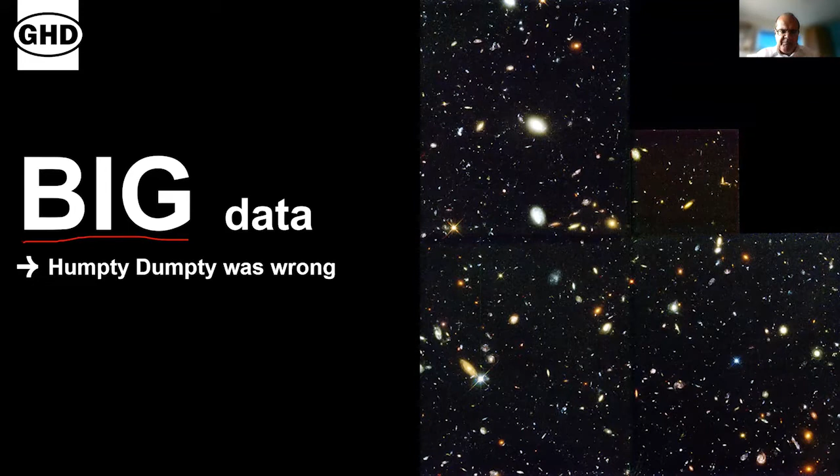So I thought we should at least try and understand up front what we mean by big data, and you'll see that I'm then going to put that into a land contamination context. That's the abstract that accompanies the program.

So I'm going to talk to you a little bit about what tiny data is, and to remind you that what we're after is getting meaningful information to help us understand our sites better, to make sure that those conceptual site models are as good as we need them to be. And the way that we do that is by understanding the uncertainty in those conceptual site models, of which there are two types.

There is epistemic uncertainty, stuff that we don't know well enough, but we could learn better if we went and took more samples, did more investigation. And then aleatory uncertainty, which is a function of the natural noisiness or variability of the thing we are studying, the arsenic, the methane concentration.

And what we are doing in using data to populate our conceptual site models, and you'll see that really well illustrated later on, is bringing together tiny and big data. And that's not a trivial action.

So the extraction of that data depends on really understanding your data, the kind of numbers, the resolution, the precision, what the columns are called, how they were collected.

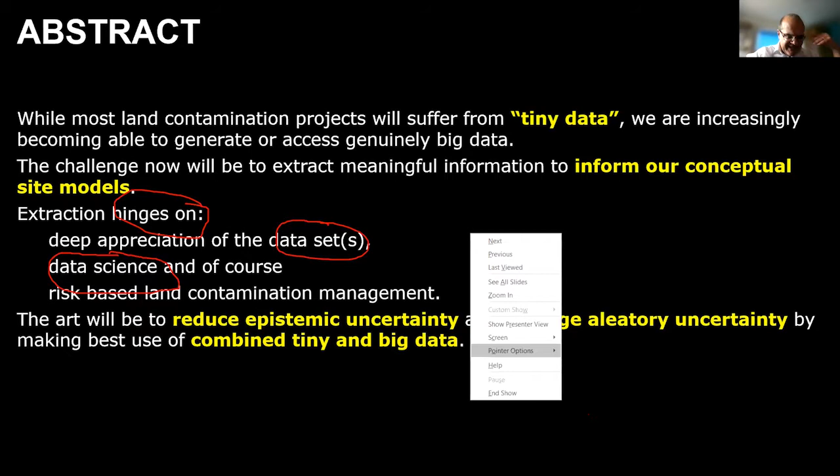So the third dimension of understanding your data and coming up with something meaningful, trying to listen into the part of the conversation in the hubbub of a party, is understanding the context in which it's being used.

And in our case, it's about risk-based land contamination management. So you need to understand your data, you need to understand the maths behind data, and you need to understand the problem space that we're working in.

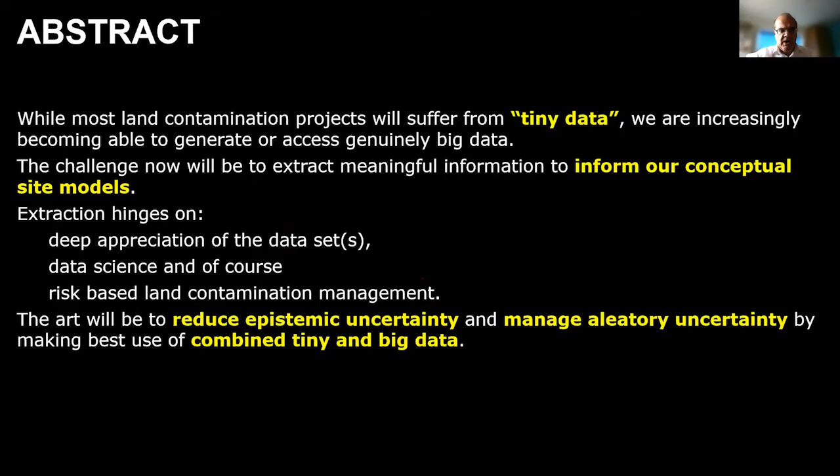So land contamination risk management, the guidance published by the Environment Agency last year, updated earlier on this year, adopts a staged approach, beginning with a preliminary risk assessment and then going quantitative with either the use of generic assessment criteria or site-specific assessment criteria, at the end of which you decide whether or not you need to remediate.

If you are, you then need to decide how you're going to do your remediation. Then you invoke your Nike moment and you do it. And at the same time, you're collecting the evidence to prove that the remediation was a success.

So that's land contamination risk management. That's the problem space we're in.

Tiny data. So I've got tiny data at one end and I've got big data at the other end. Tiny data is where you've got such a small number of sample locations, analyses, that each item is precious. So you don't summarize it, you don't produce an average, you deal with your entire data set.

And I've taken from the front of the statistics guidance that CL:AIRE published last year, a checklist of 7 things you need to think about before you open page 1 of that guidance. So before you embark on a statistical analysis, you're supposed to check the 7 things in front of you.

I'm not going to go through them, but I am going to go to the last one. And that is that before you embark on any clever statistics, you need to be satisfied that the number of samples is enough for a statistical analysis.

And if it isn't, well, anything you do after that is invalid and likely to get you or your client into trouble. So tiny data, we don't have enough to do averages and standard deviations and that kind of stuff. Big data we'll look at next.

So the traditional way of looking at big data is through a series of V's. And originally there were 3: volume, velocity, and variety. More recently,

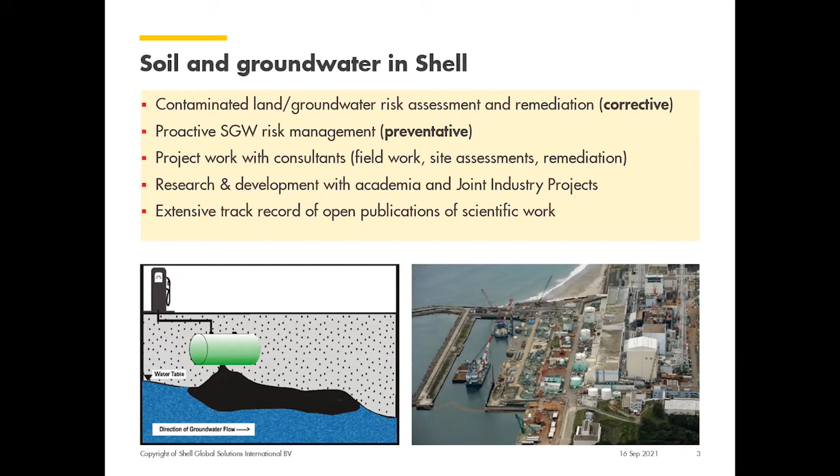Also in R&D, GWSDAT has come about from a joint project with the University of Glasgow, and that's been going on now for almost 10 years effectively. We like to work in an open and transparent manner as well.

So GWSDAT, what is it? It's a user-friendly open source decision support tool for analysis and reporting of groundwater data. It's designed to be easy to install, quite intuitive to use, and it only requires a standard monitoring data input.

A little bit about the history: it was principally designed for the retail networks, right? So this is the smaller sites where it perhaps wasn't worth the effort in moving that into a full ArcGIS system, that's where it actually came about. It's grown in scope since then, and it works equally well for the larger sites as it does for the smaller sites as well.

There's a variety of different ways you can input the data now, and we'll show some of that in the interactive demonstration. The holy grail that's not there at the moment, which can be done but we're still waiting for it, is directly into database. I think that's the next big thing in GWSDAT in terms of data anyway.

It's been used now for over 10 years in Shell, typically in its combination of refineries and terminals and all the rest of it. And we did a survey, and there were 4 common themes where the benefits came out of it.

Supporting design optimization and monitoring remediation programs, so we avoid collection of redundant data, and we want to know where the weaknesses in your monitoring program are. You can spot early identifications of new leaks quite quickly.

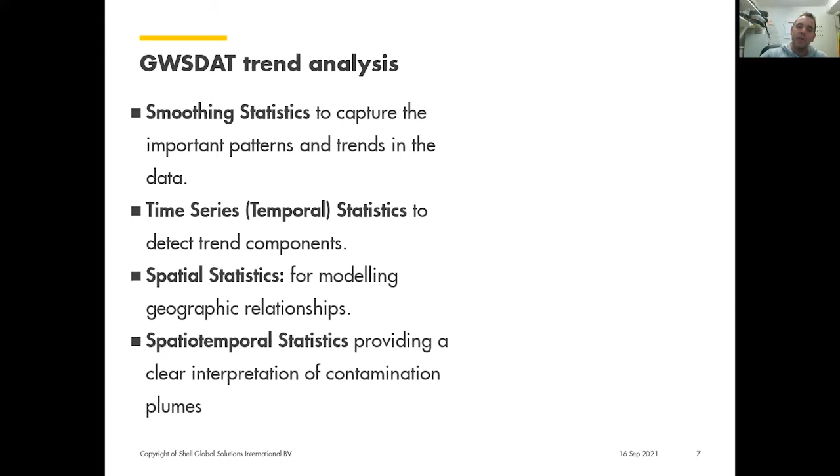But what we do for the groundwater concentrations is very unique. The unique aspect of GWSDAT is that we do spatiotemporal statistics. The way the industry typically works is we do a sampling round, sample concentrations across the site, and do a kriging to fit a spatial surface to it. Then we'll repeat that exercise independently for the next sample round, and again. GWSDAT does it differently.

Instead of doing three independent models in this use case, it does it in one spatiotemporal framework. And there are benefits in doing that. Most notably, it's about the amount of information you gain from that complete data set. You get more information out from fitting one spatiotemporal model than three independent ones, basically.

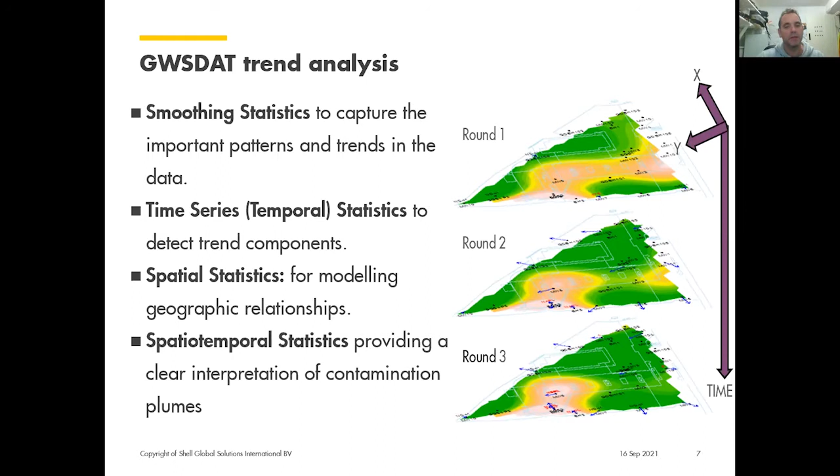GWSDAT has got some plume diagnostic tools in it. What this means is it has the ability to automatically track the plume mass, plume area, and average plume concentration. And you need to do very little, basically.

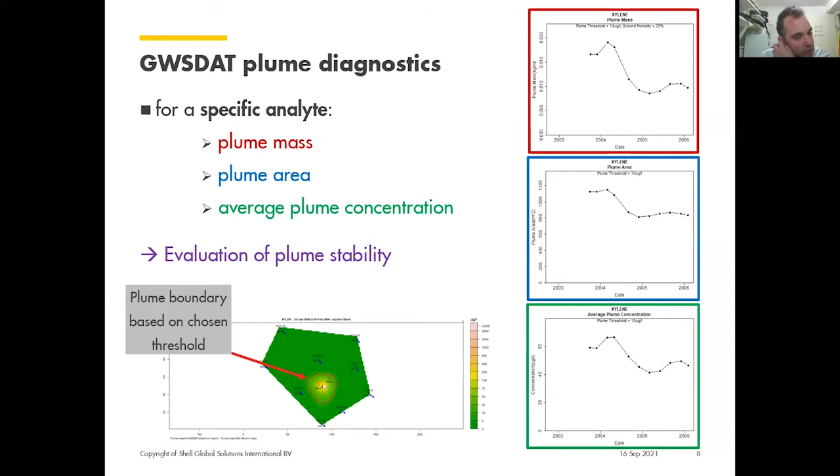So what it does is take this surface and basically just numerically integrates under that curve, effectively. You'll also notice there's a cross right at the bottom there—that's pointing to the center of mass for that plume as well.

In terms of going forward, the major future direction of GWSDAT is going to be network optimization. We'll reference this paper here, and what we do is quite a technical study—comparing simulations of groundwater plumes and real data sets, looking at the difference between doing independent spatial models versus one spatiotemporal model.

You can see that basically you get more information using fewer observations with a spatiotemporal model. And of course, the people already using GWSDAT get this benefit, because it's adopting that spatiotemporal framework. This is what my kind of mission is—trying to push the benefits of spatiotemporal analysis in this domain effectively.

We've got a new PhD student, Peter. He started back last year, actually, working on implementing cost-effective spatiotemporal approaches to optimize groundwater monitoring network design analysis. So basically he's going to be looking at bringing more tools into GWSDAT, like well redundancy, or more sophisticated well redundancy, well sufficiency.

In other words, if you had to build a well, where would you construct it? Sampling regimes which take advantage of the kind of spatiotemporal network, etc. So there's a lot of work that Peter's got on his plate there.

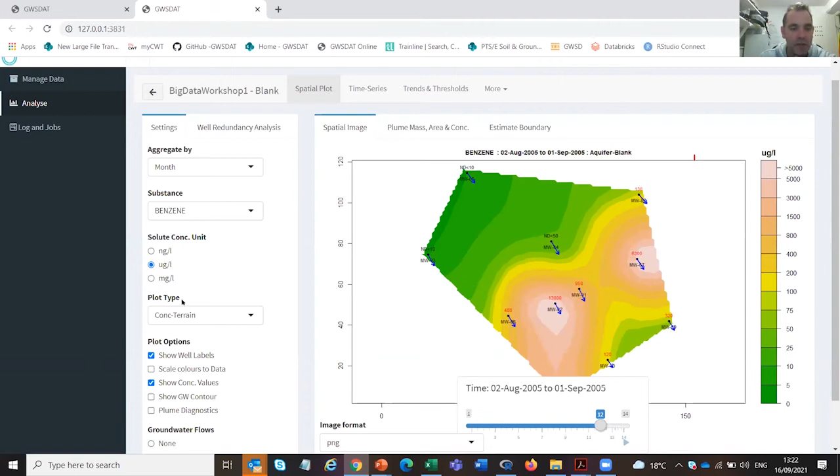There are also kind of bubble plots. If you don't trust the spatiotemporal model for any reason, you can always fall back on just a graphical depiction of the observed data set.

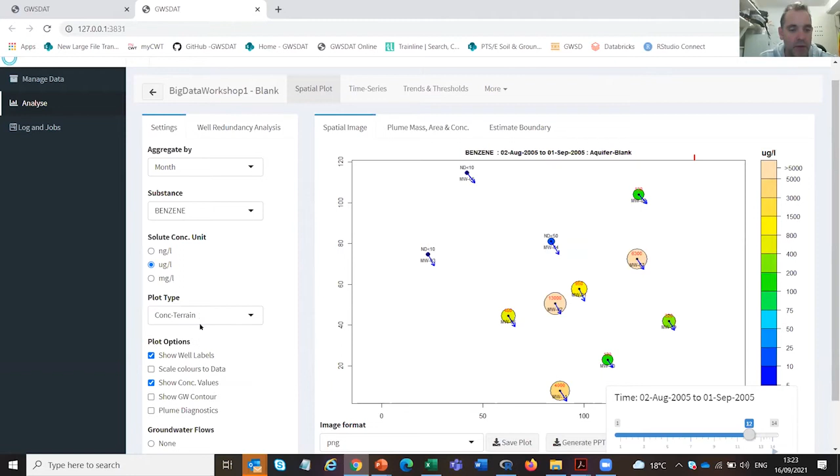There's even a black and white color scale as well, which is useful when printing out these types of graphics on black and white printers. What we found is, if you print this in black and white, it doesn't naturally translate very well, so it's a useful addition.

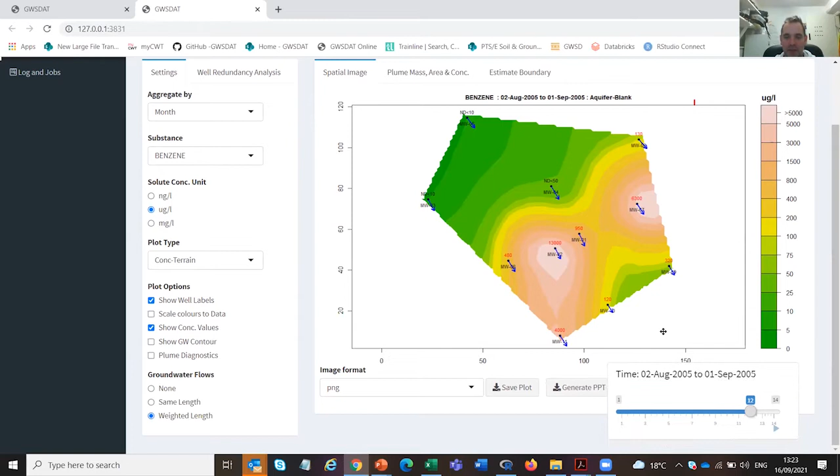And you can also turn off the groundwater arrows as well. So on this tab here, what we have is the plume mass and area concentration.

I'm going to choose xylene here, and it's going to answer one of the tutorial questions effectively. You can see just by selecting this tab and clicking plume diagnostics, it basically delineates the plume using a concentration value of 10 micrograms per litre.

You can change that as well to what you see fit. And you can see, because it's managed to delineate that plume without going outside the site boundary, it's produced some plume metrics, namely plume mass, plume area, and you can see the centre of mass there.

By clicking this tab, what this does is it effectively does that going through time. What we found is that's more useful than just looking at the evolution of the individual spatial images. So that's question number two from the tutorials answered effectively.

How do we get a time series? Well, it's easy peasy. You just click this tab here and it'll do it for you effectively. Yeah, and you can see.

There's one question. Someone's saying in the chat box that they get an error, non-numeric argument. I'm not sure if that's something you could address. I get an error non-numeric.

Oh, I've not seen that one. Is this on the online version? Maybe on no local. Oh wow. Okay, well, maybe we can take this up. Or do you want to share your screen, or how do you want to do this? Can you provide a bit more details?

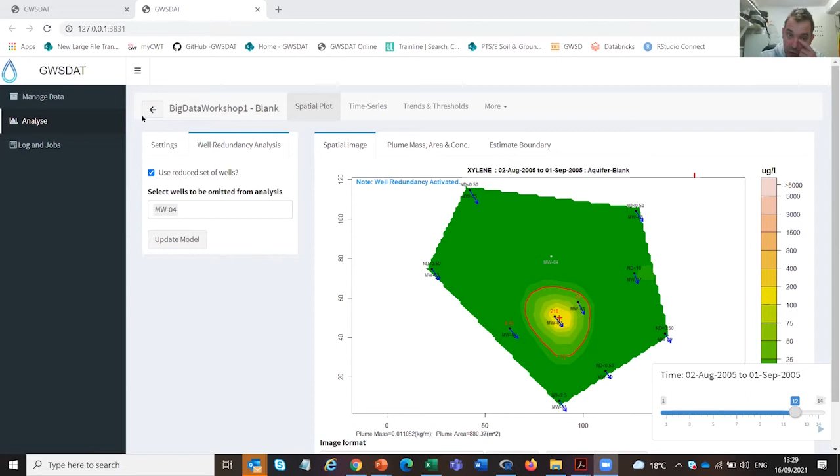If you choose xylene, that's the key here, okay? You need to choose xylene, because with xylene you can get this delineated plume that doesn't go outside the site boundary.

If I choose, for example, benzene, you can see the plume isn't fully delineated within the site boundary. So when I do that, you get 'unable to calculate' - it needs to be completely within the site boundary. I think that answers that question.

All right. Cool. Okay. All good? Yeah, that's good. Cool, right, okay, I'll carry on - good questions, good questions.

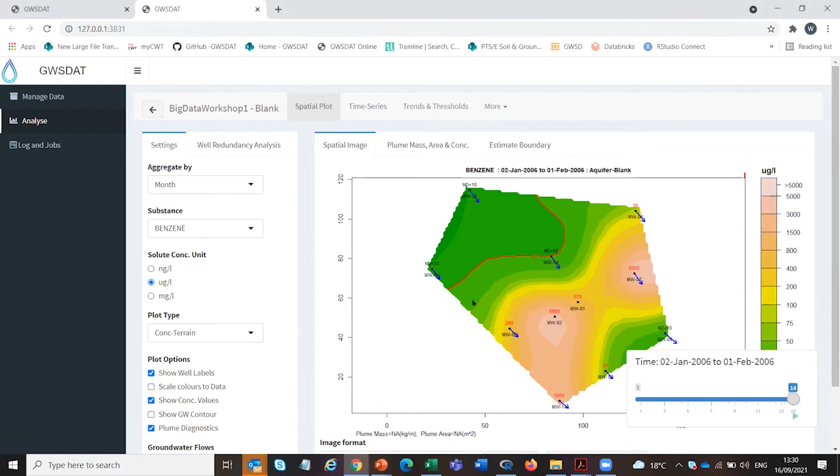So that's mostly it about the spatial plot. Let's go to the time series. This is what I spoke about earlier, where you can basically choose different wells and substance combinations and drill down into individual wells.

You can see the data here for that well in black. Non-detect data gets plotted in orange, and we've overlaid the predictions of a one-dimensional smoother. This is key to the difference between fitting a smoother function as opposed to a linear regression - the linear regression interpretation is just flat and straight throughout the history of the well. But in reality, I'm more inclined to believe this, which says it increased rapidly and is gradually going down in time.

There are various different options, like showing a legend. You can also overlay the groundwater elevation on the right-hand scale there, and that's useful for picking up correlations between groundwater elevation and concentrations.

There's also another functionality here which does more combined analysis. It's called the well report, and this menu here. Basically, you can choose to overlay multiple substances or solutes in a grid-like structure, so you can drop any combination of wells, update the plot, and choose different solutes.

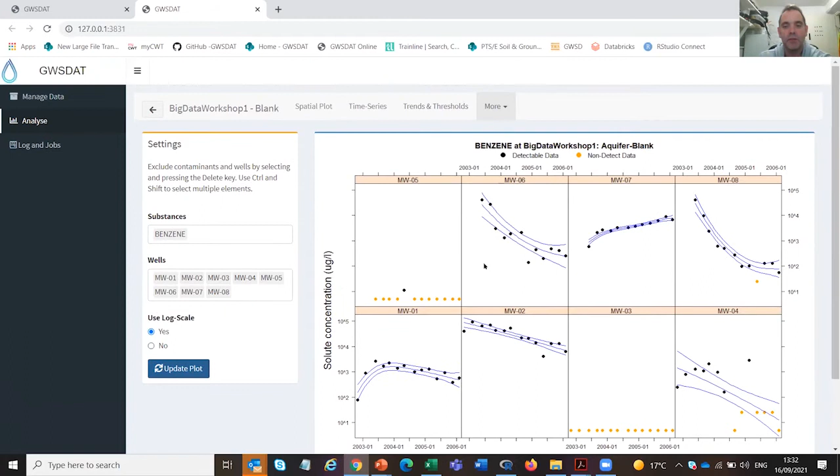If you just choose one substance, it does something slightly different, giving you this smoother result, which you can turn off at any time. It's one of my favorite plots because it plots everything in a single plot. It's very concise - the kind of thing that used to take ages to do in Excel. Even on that basis alone, in terms of producing graphics and display plots, it's very good for saving time.

The other tab here is a trend and threshold indicator matrix, and this is going to answer question 2 or 3. What we have here is a matrix plot - the columns correspond to the different solutes and the rows correspond to the different wells. What this is doing is looking at each one of these individual plots and calculating the gradient at your selected time point, which is at the end, after the most recent sampling. It's looking at the gradient at this point and reporting it back using this color code.

Strong green or dark green means it's coming down quickly. Strong red means it's going up quickly, and white is approximately flat. It's gray if there's no data to calculate it, and it's blue if it's non-detect. I think it's safer to just report it's non-detect rather than start interpreting trend from substituted data.

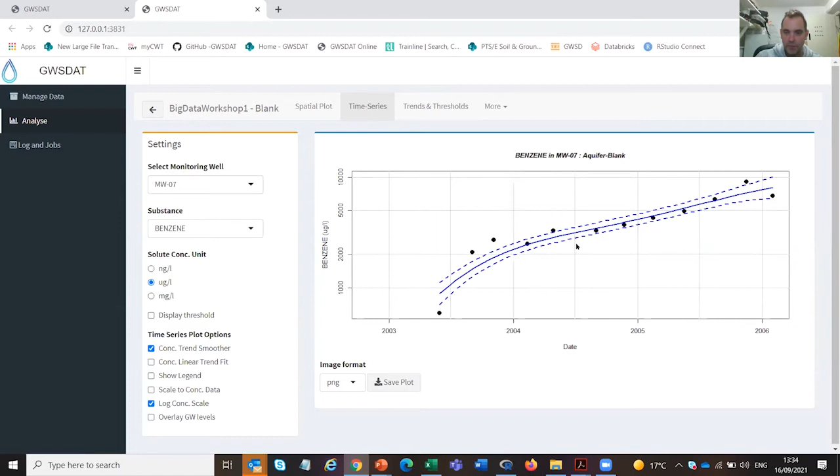You can see here in this example we've got 2 reds, and that's benzene, monitoring well 7 and 11. So if we drill down back on them, look at number 7 - there you go, lo and behold, you can see that in this well it is going up very quickly. Monitoring well 11 is still going up very quickly as well. So this is a high level, high throughput check on all the different combinations of wells and contaminants, where you can identify the problem wells.

There are a variety, so that answers question number 3. The answer to that question is benzene and monitoring well 7 and monitoring well 11. Let's go back before I do some more.

Let's familiarize ourselves with the next questions. Using the online version, loading the previously saved GWSDAT session, basic example - how do you save a GWSDAT session in RDS format? Well, with the online version, let's do the comprehensive example. Can you plot NAPL thickness and repeat using the Excel-based menu?

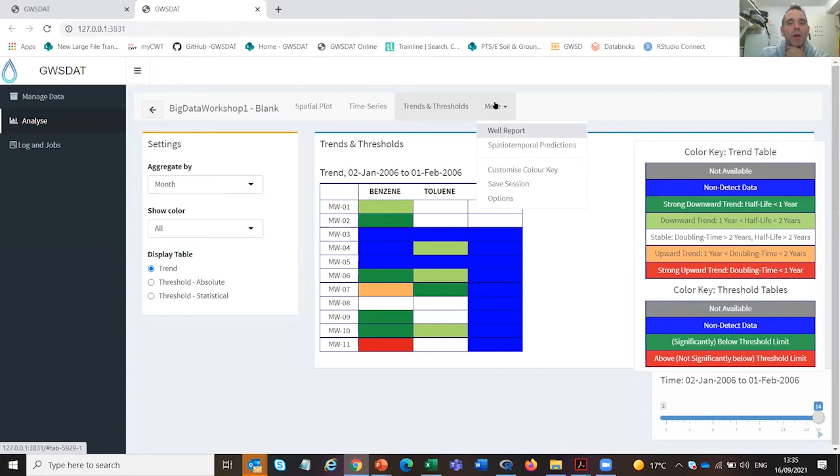Well, let's find out more about the tool first. So I've talked about the well report. There's also a goodness of fit check here called spatiotemporal predictions. What this does is, for a predefined solute, it plots the data, but then overlays through time slices of the wells the predictions of that spatiotemporal smoother.

So the spatiotemporal smoother has got to do a lot if you think about it - it's got to fit and smooth out all the data, not just spatially, but through time as well. This is basically a goodness of fit check, just to check that the underlying spatiotemporal model is truly representing the data that it's seeing. It's not an interpolation method, so it doesn't go through the data points - that's what some people get a bit surprised about, but you've got to check for systematic bias.

All in all, in terms of predictions of the model, it's doing quite well at the well locations. The only thing you might want to be slightly careful of is it tends to over-predict in monitoring well 1 and tends to under-predict in monitoring well 2. So there's some systematic bias there, but there's nothing to be alarmed about in this picture here.

What you're looking for basically is big gaps between where the data is and where the model predictions lie. That's what this is most useful for.

As I alluded to earlier, there's a customizable color key here where you can customize the menu, the color scheme in the spatial plot, any way you see fit. So I've updated it for xylene, and you can see that's been modified to 2,500, where it was previously 3,000.

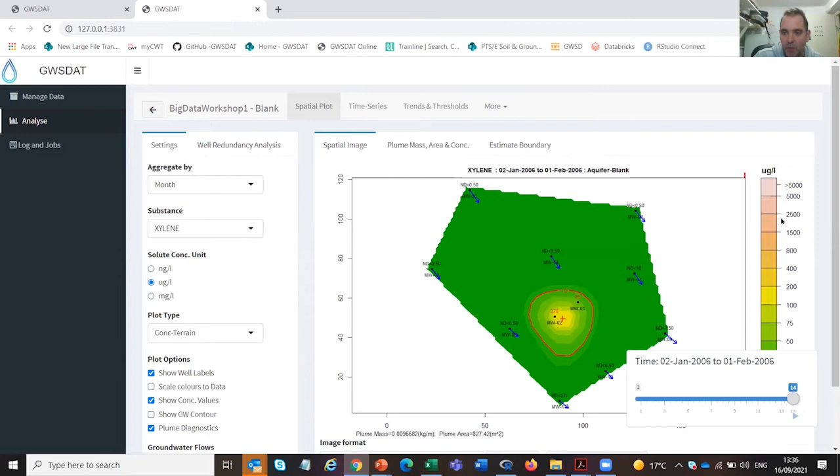I would warn against using too fine a resolution, because you might be over-interpreting the results of the modeling. The variability might be fairly high in the measurements, so be careful in over-interpreting the model.

There's a variety of different options here, where you can choose things related to images, some related to the plume threshold values. I think the most important here is the model settings, the resolution of the model.

Model resolution is the kind of complexity that your model will allow. We've picked the default value, which is equivalent to this parameter having a number of segments equal to 6. It tends to fit quite quickly, but we can up that.

Sometimes when you see numerical difficulties, the best thing to do, and I'll talk about this at the end if we get time, is to up the modeling resolution. What this does is take longer to fit, but it gives the model more flexibility to capture the main features in the data.

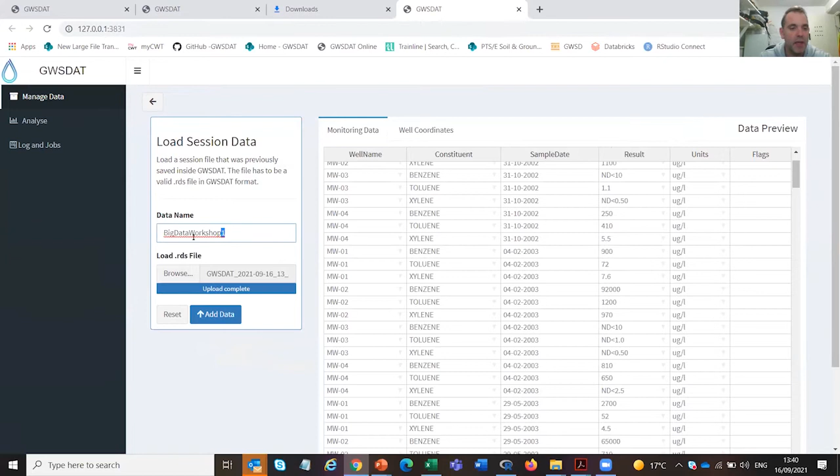There you go, it reads it in. It's even picked up the name as well, 'Big Data Workshop 1'. Let's add the data, click Analyze, and there you go.

One thing you'll notice is that it's read in that session data and actually kept all the settings as well, whatever you previously saved, all the rest of it.

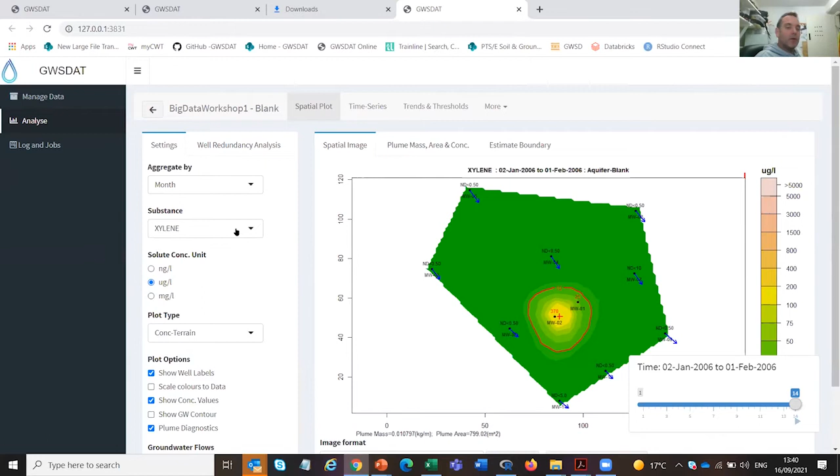I think this is very useful if you've got multiple people using GWSDAT. You can just save it off as this RDS file and away you go. Email it to someone, and they can pick it up and import it very quickly. That's very useful for analyzing data sets, etc. So that's question number 4 answered.

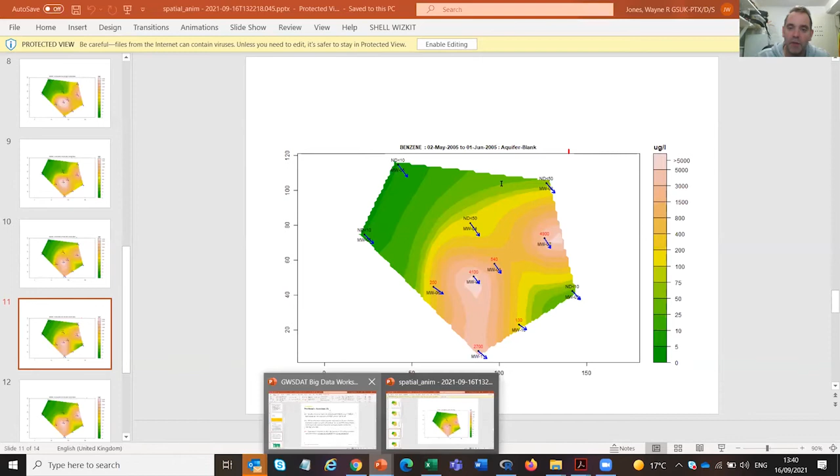So using the online version, loading the previously saved session - I encourage you guys to do that. Basically save off a session, save it to your hard drive, go back to the online version, and away you go.

Question number 5, then: with the online version and the comprehensive example data set, use the import Excel feature to perform an analysis of this data set. Can you plot NAPL thickness? Repeat, but this time include a base map with a site by incorporating shapefiles located in the GIS folder. Whew, this one's a tough one.

So let's do this for the online version actually, just to be sure. Okay.

It's a bit slow, I think, so let's not do this in the online version. I think a lot of people are using it, so let's just do import instead. It's exactly equivalent to the online version, basically.

If you want to bring an Excel file into the online version, it looks a bit like this. This is the comprehensive example. Just do import Excel file, browse to the file, and it picks up the .xls file. It's downloaded from the website, and there you go - you can import it. You can see it's got the well coordinates, the monitoring data, and all the rest of it.

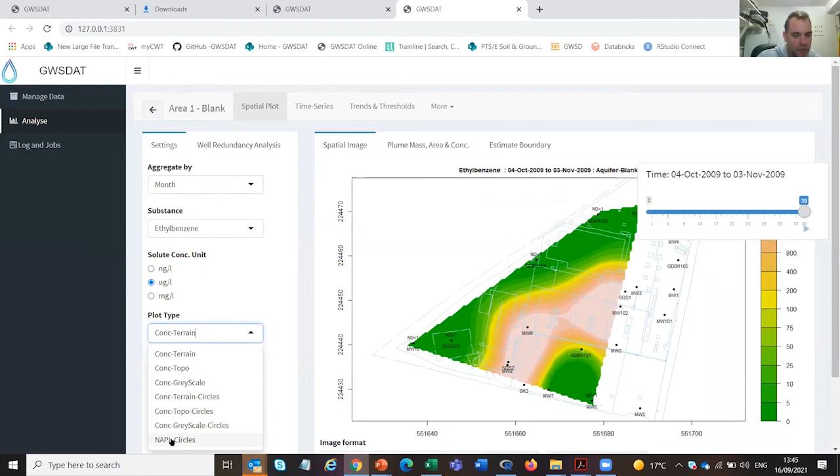What this shows effectively is size-scaled, color-coded NAPL bubbles. Here's an example where you can read off the thickness on this chart. You can plot the distribution of NAPL across the site, and animate it and change it through time any way you like, like so. So that answers question number 5.

I guess the only part left is to do number 6, which is basically give you an example of doing this in Excel as well. We read in the raw CSV files, the Excel files, the RDS files - I just want to show you how we would do it in Excel. This is what the Excel add-in looks like, I've pre-populated these example data sets. The user manual is there online. To do analysis, you click and analyze, it asks you to accept terms and conditions, and you're given a set of options. I suppose the most important ones are handling the non-detects.

You substitute with half detection limit or the full value, and you use the default or high modeling resolution. You can change the modeling resolution within the app as well. So I'm just going to click OK.

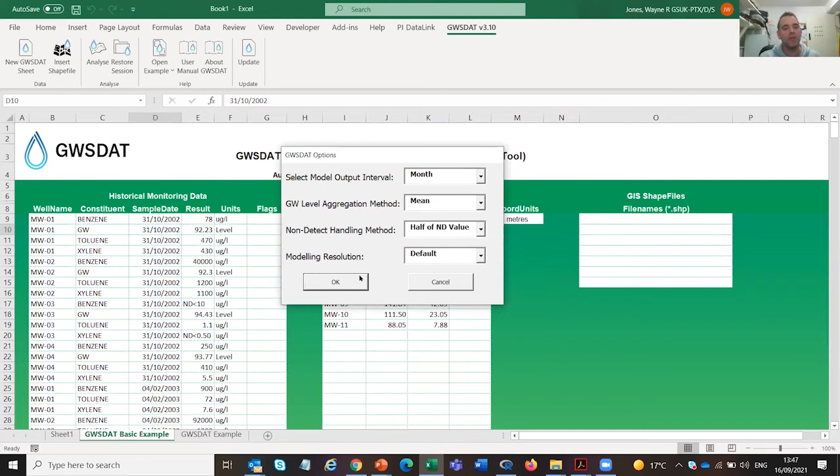How this effectively works is a lot like the CSV one. It grabs this data, produces the relevant CSV files on your temp directory, and produces a script that tells R where to go and pick up these files from, and that's why it's exactly equivalent.

So yeah, the Excel front end is a bit more sophisticated. It looks more sophisticated than it actually is, basically. And again, you can see that you've got this analysis exactly equivalent to what it was previously.

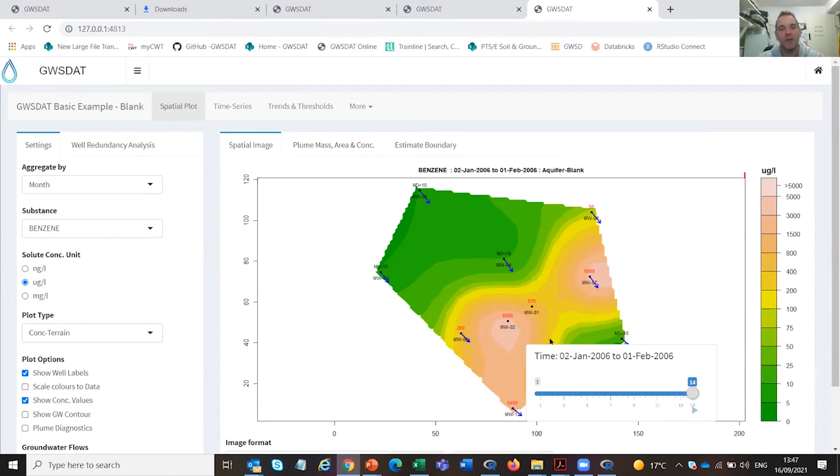I'll just finish off by doing the comprehensive examples. All exactly the same. You can see that in this instance now you've got the NAPL measurements, NAPL thickness measurements as well, and you can see here 19 millimeters on the 29th of July 2009.

The difference I said previously is that you only need to give it the .shp shapefile and it'll automatically pick up the rest. That's one of the major differences with Excel, because this is local - it can access your local directory and pick up all the necessary files. The online version can't do that. You've got to be wary of that.

And it's just the same. Again, click analyze, and you'll be asked the question in a minute when it does the analysis.

So it first chooses which aquifer you want to actually analyze, like so. I'll click the blank. It asks you about NAPL substitution - I've been through that already.

And away you go, it's fitting the model, and there you go, it's plotted the results, and it's exactly equivalent basically as well. Cool.

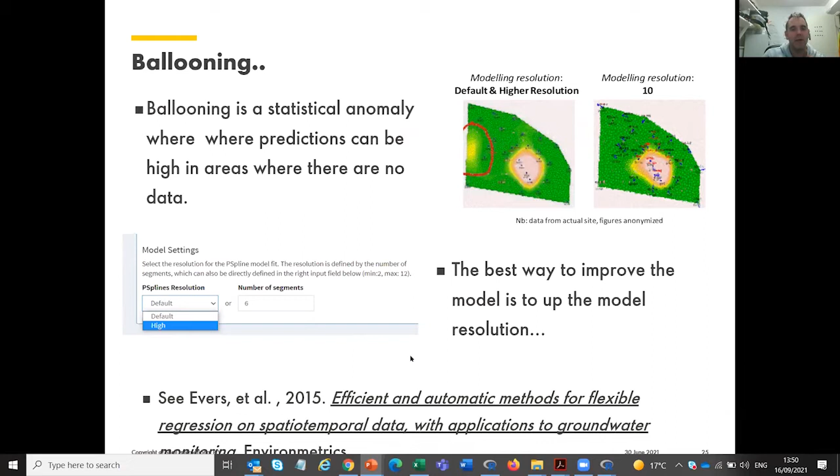Again, I would encourage you to check the model. This is using the spatiotemporal predictions plot, just to make sure that the model you're demonstrating in the spatial plot is representative of the data you've collected.

In terms of the Plume diagnostics, the major assumption is we model spatiotemporal 2D space and time. We don't model any heterogeneity in thickness, right? So we assume that the aquifer is homogeneous in depth, and that's why the model is done on an aquifer by aquifer basis - because we don't model that change there.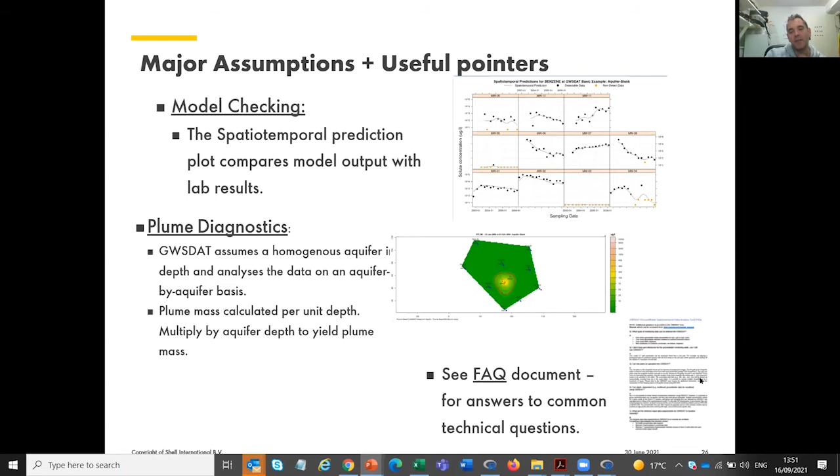Also, there's an FAQ document on the API website. If you have any issues, use that as your reference and the user manual first before contacting myself. I think a lot of the answers to questions previously asked have been answered in that text as well.

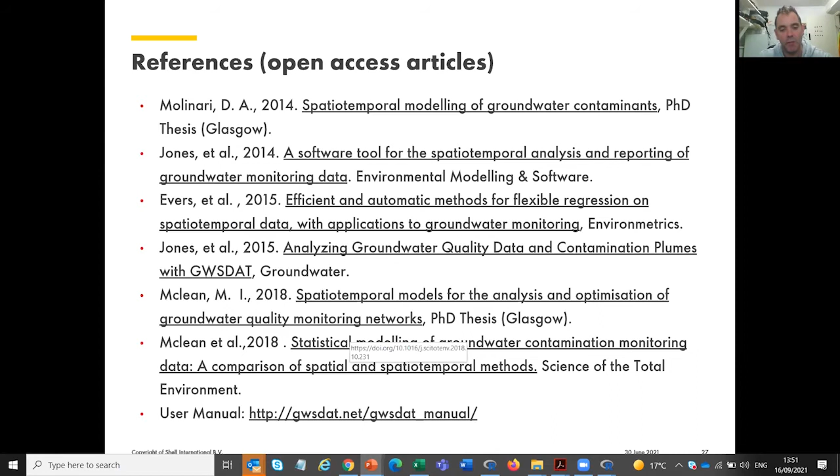If you look at the GWSDAT web-based website, you will see some examples of case studies. These are good, and I'd ask you to have a look at them, because that really helps give you examples of where GWSDAT is useful.

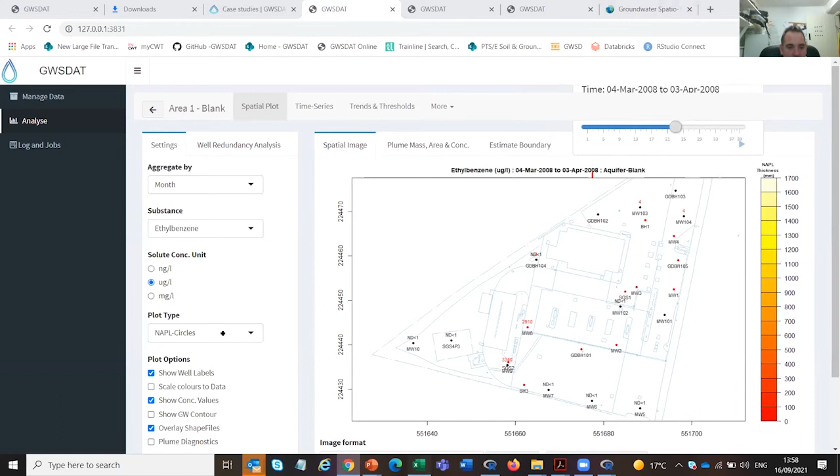So... oh God, let's get the simple example going. Let me just pull up the simple example — so it was the concentration threshold and the plume threshold, right? Okay, let me just get this up and running.

Okay, so the plume concentration threshold value is what you're used to delineate this plume here. This uses a value of 10 in this example, and you notice there's something in the options which says concentration values. You've got the plume ones, and you've got this plume concentration. I didn't actually talk about it in the talk.

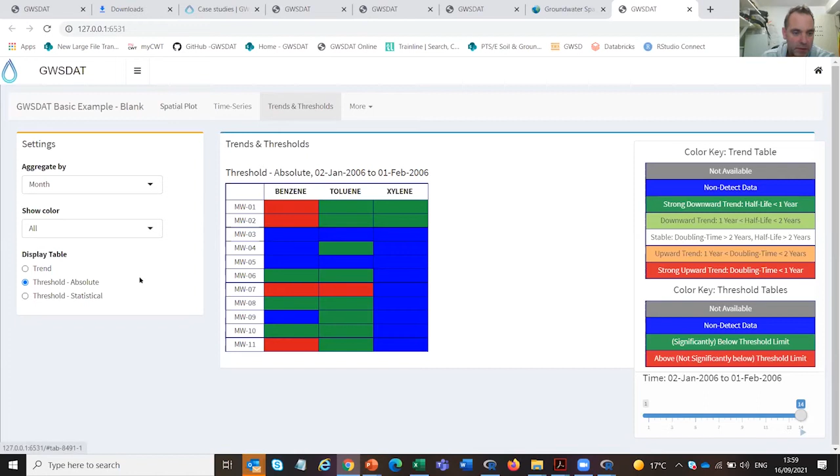The default is for the trend and threshold indicator matrix to basically look at the trend. But instead of the trend, you can look at a threshold value. Basically it asks the question: is that data point above or below that threshold value? You can see here that threshold value, I think the default is 500. If I display the threshold value, it's saying this is the value of 500, is this below or above the 500? So instead of looking at trend, it's just looking at absolute values and asking whether it's below.

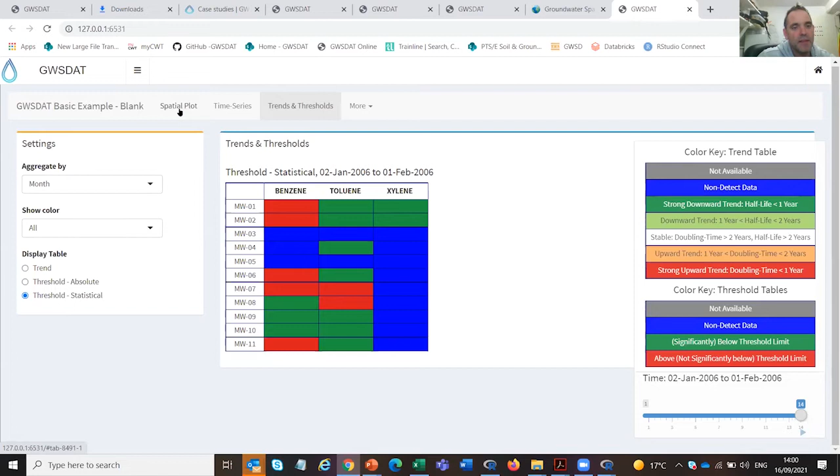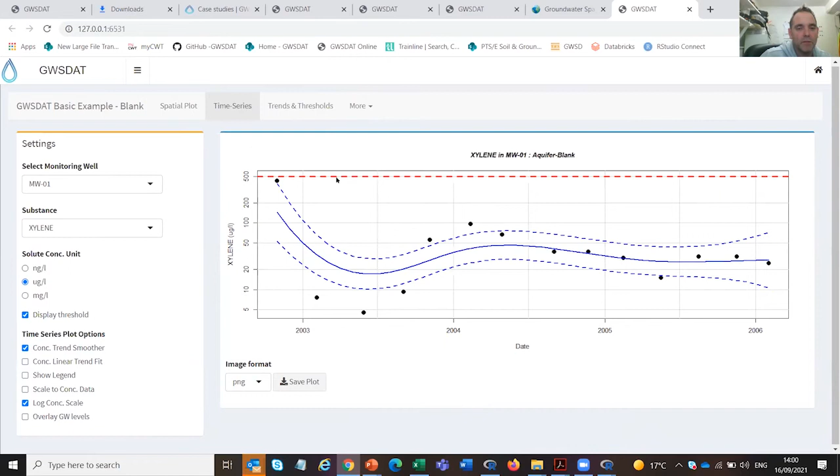There's also a threshold statistical, and what this is doing is actually saying, is the upper 95% confidence interval for that trend fit below that threshold line as well? Hope that answers the question.

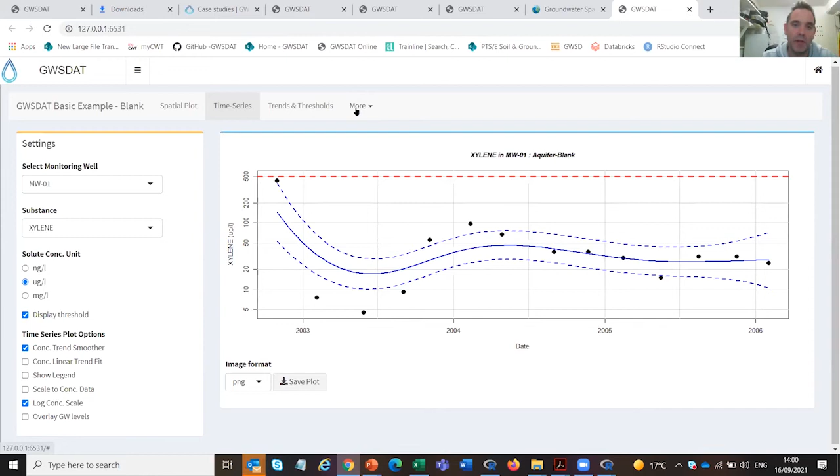I think so. I guess what I'm thinking about is, if I've got specific site thresholds, would I be entering those as the concentration threshold and not as the plume diagnostic? Yes, you would. You do it in options, and you put them there, concentration thresholds there. Okay, thank you, all right, cool.

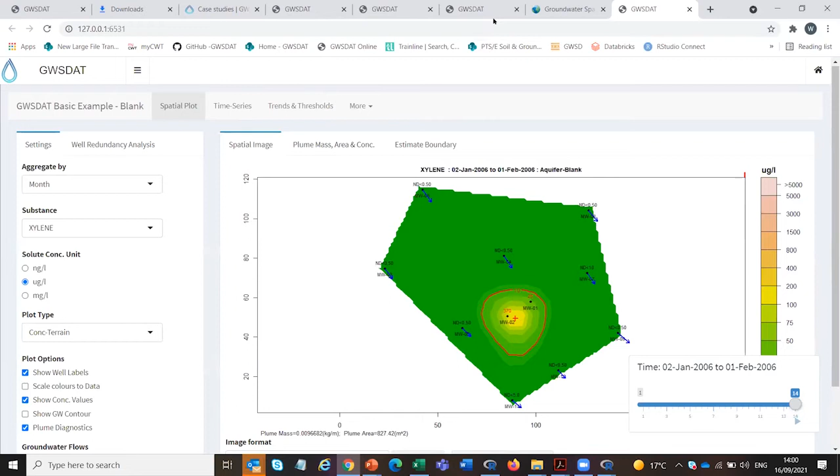Okay, I'm all talked out now. That was really good, thanks a lot, Wayne. So I think we've just about run out of time for that one. But much appreciated, really interesting. I'm sure Wayne will be available for follow-up questions if people still want to talk about GWSDAT. Feel free to email me if anyone has any questions on it.

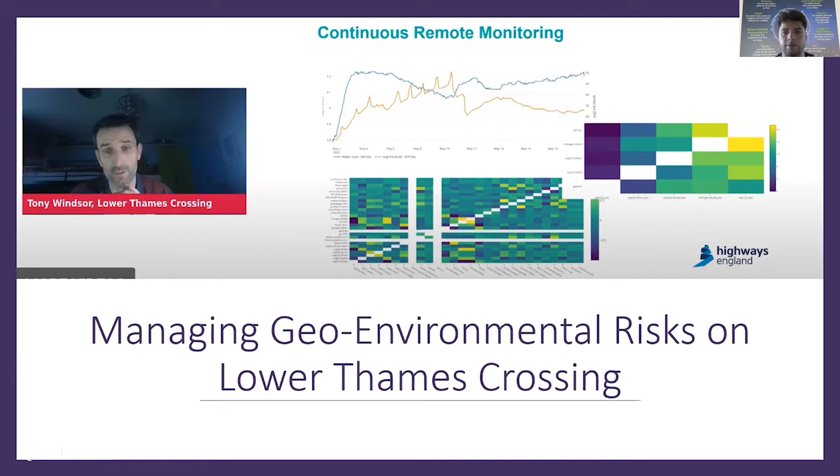Okay, so that was Tony talking about Lower Thames Crossing. Thank you for listening to that part. I'll go into some of the advantages Tony mentioned there and highlight a few of them.

What Tony said there was that they might miss quite a lot of the critical parameters affecting the gas regime, as well as tidal influences. This technology enabled them to identify the critical parameters five times faster, allowing them to proactively intervene with any risk on the project.

Also, a lot of the area on the Lower Thames Crossing was farmers' land, and landowners weren't exactly happy with repeated visits from site engineers doing manual monitoring. By using automated systems which are installed once in the field and then left there, streaming data into the cloud, there was an 85% reduction in cost and disturbance to landowners in those areas.

Also, using the technology minimized the risk of expensive project delays. If there was a delay due to a data shortage, this could cost the project thousands or more, because if a project is at a standstill, they still have to pay for contractors and equipment, diggers and whatever was on site longer, waiting on data. Getting everything streamlined, especially on big infrastructure projects, is priceless in the long run, because it shortens program time and minimizes overall project costs.

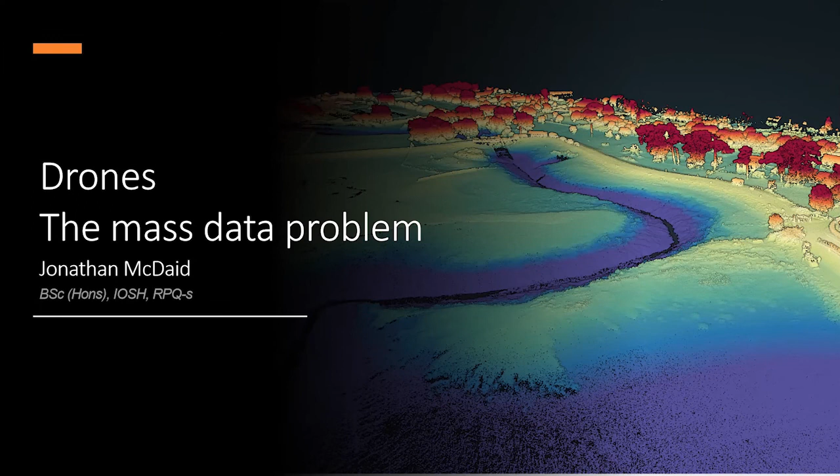Okay, well thanks Matt for the introduction. As Matt alluded to, I'm Head of Survey over here at Texo DSI. For those that don't know about us, we are a survey and inspection company based across the UK and operating across the world. The range of industries we work in is offshore survey, the nuclear sector, land mapping, development management, so a wide variety of sectors and methodologies that we use. But we're here today to talk about mass data and really the issues surrounding that in relation to land condition and management.

As a company, we actually operate 26 different types of UAVs, unmanned aerial vehicles, and over 23 different payloads. Much of what has been touched upon within this seminar itself - you have your visual sensors, your LiDAR sensors, thermal, spectral, gas detection payloads, and ultrasonic payloads as well. So certainly a range of different payloads and platforms contributes to giving you as clients the most accurate and up-to-date information, and really giving you the best and most information to make the best decisions about your site. That can range from topographic surveys, ground monitoring surveys, utilities, engineering, measured building, you name it. And it really feeds into the data set part of big data that Paul had alluded to earlier in the presentation.

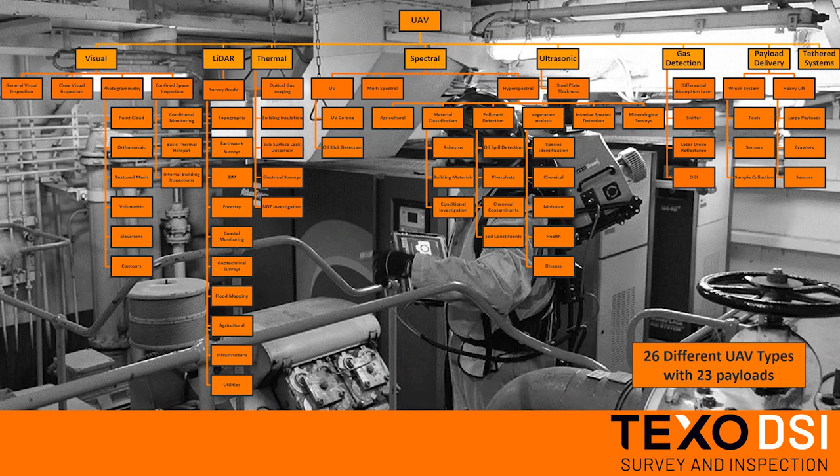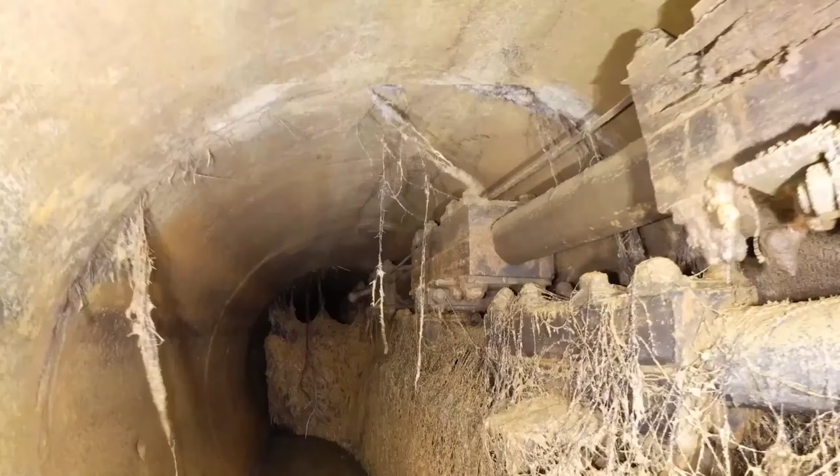However, at the other end of the scale, we operate smaller drones such as the Elios 2 system. This is a drone contained within a carbon fiber roll cage and can actually go into culverts and pipes as small as 600 millimeters in diameter. This feeds into the notion that data can be collected in areas sometimes inaccessible to humans, and more importantly, can provide you with valuable information across your site that otherwise is unobtainable.

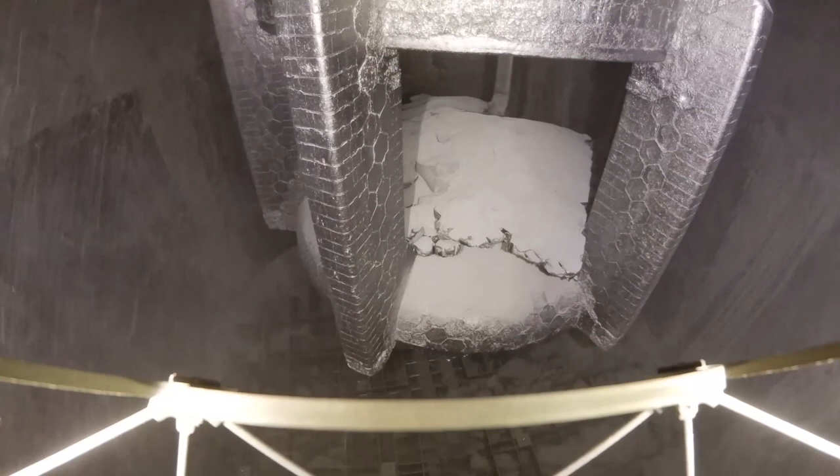But the issue with all of that is the amount of data that comes from it. Each minute of data collection is gigabytes worth of data. It's 4K video that can be streamed back to the controller. And the LiDAR data, even more so - it's billions of points on a surface to develop a 3D point cloud. Essentially it's a huge 3D model of an environment, which I'm sure you're familiar with.

That unique blend of ground-based survey and unmanned aerial collection via UAVs offers unrivaled capabilities, but how we present and interpret that data is the critical element. We alluded to the velocity of data coming to you - if you can't handle that as a client, or use that information to make decisions, then it's pointless, really. What you see on screen here is a photogrammetric model of a lighthouse that was collected using thousands upon thousands of images from a drone, then stitched together to give you information you can use to make better decisions about that site.

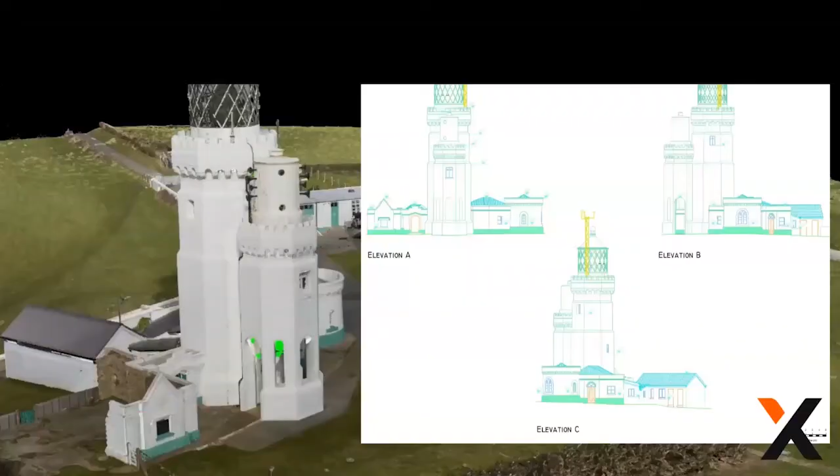And from that, you're getting your traditional 2D drawings. So that's where you get that blend of how you go from the collection phase to the use phase, or how you gain information from it essentially, as you can see on screen.

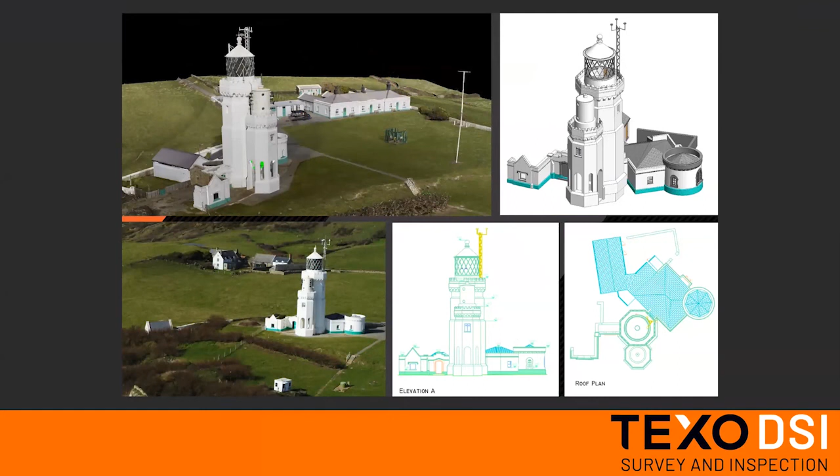Drones also enable us to produce 3D models of offshore platforms, tens of thousands of images which have been stitched together and registered to produce survey-grade models. And we take these methodologies that are used to create the lighthouse, to create the offshore platform, and we apply those to land mapping as well.

Traditionally inaccessible mudflats - this was done as part of a coastal sea defense construction project. A single pass with our UAV LiDAR system here was able to capture millions of points at 3mm spacing on this surface, and we were able to produce a 3D point cloud at low tide of that entire area. From that, you're able to delve into contour plots, into accurate 3D models developed of the fence lines and structure within the sea as well.

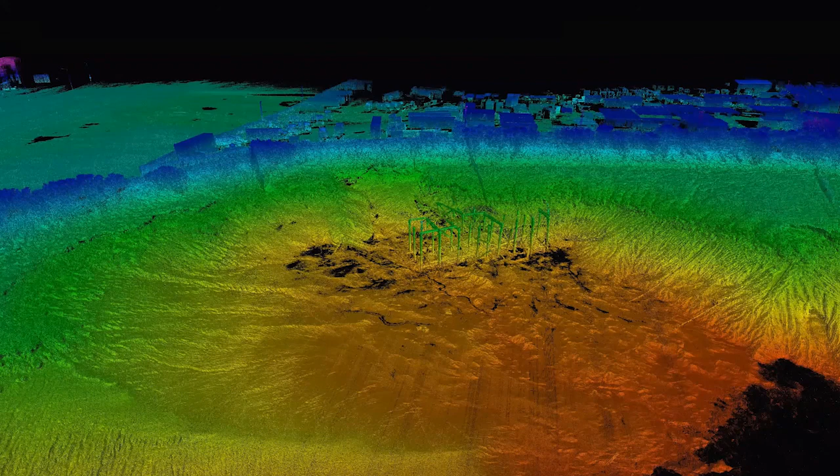Again, traditional limitations of measurement in the survey industry would be, in this case for the cliff deformation, the inability of traditional sensors to collect enough information to allow you to gain information. It would also be inefficient - dense vegetation and inaccessible areas, and obviously health and safety concerns for manual access. However, using UAVs, what we're able to do is gather billions of points on those surfaces, stitch together a 3D model, and then essentially you're able to step into a digital twin, which is a real buzzword in the survey industry at the minute.

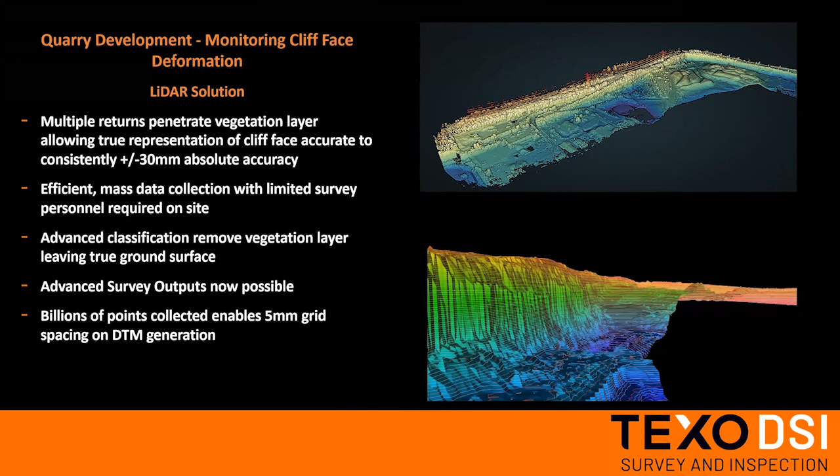And from that, you're able to obtain 2D contour plots such as this, and height shaded digital terrain models, again giving your project valuable information that decision making can be taken from.

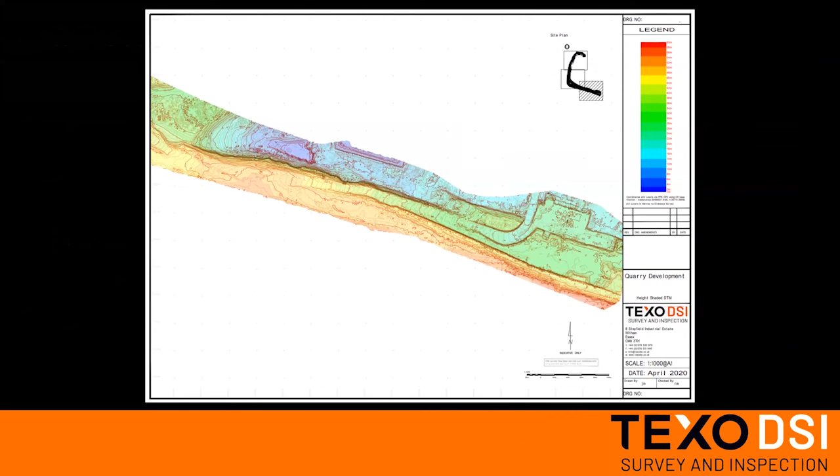It's not just point clouds. From drones, we're able to obtain high resolution imagery. That is incredible. We're 60 feet above a railway line there using a Phase One camera, and you're actually able to read the nameplate on that sleeper. So incredible resolution.

However, with that resolution comes the data size. Each one of those images is about 1 gigabyte. So when you're talking about handling that data and how to make use of it, you really need a robust way of doing so. And as I'll show you later, that's something that a client portal such as Texo, and indeed there are others, comes into play.

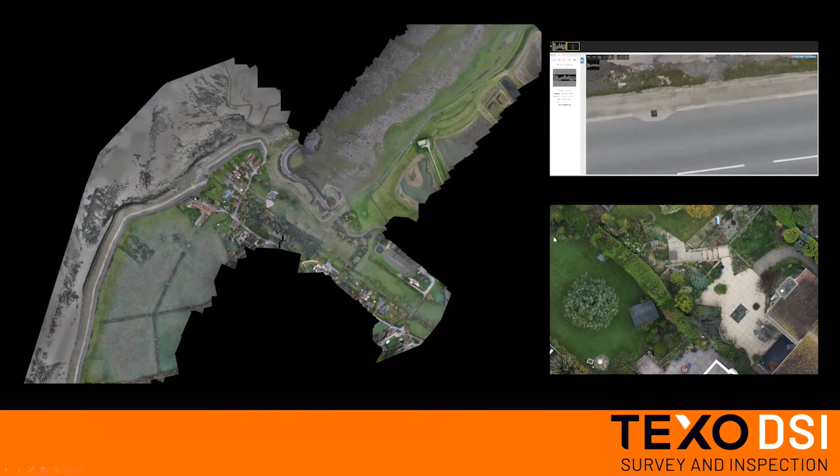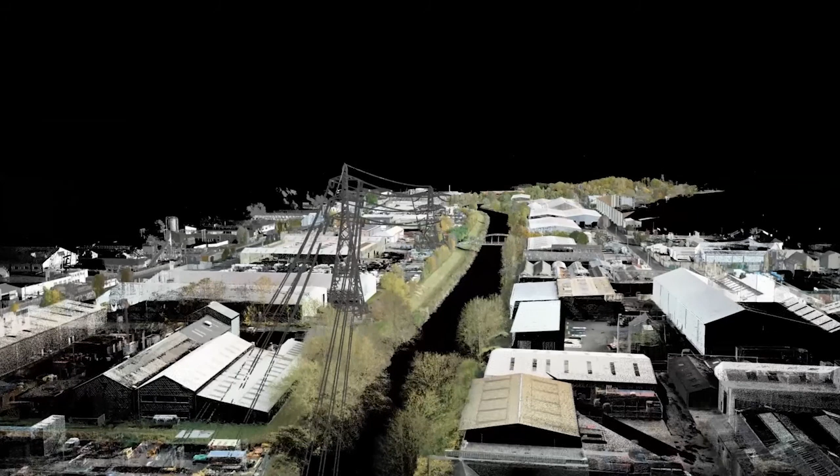So moving on from that, we briefly talked about LiDAR. This is the type of data that you're now obtaining from systems that are available. An incredible amount of information collected in the space of this project, for example, 30 minutes, and actually being able to handle that and manipulate it is key.

Likewise, here for a flood defense project, our LiDAR system is able to penetrate through vegetation. You're able to build accurate digital terrain models. But again, you're left with huge data sets that, if you can't interact with and can't get the traditional outputs from, are really pointless at the end of the day.

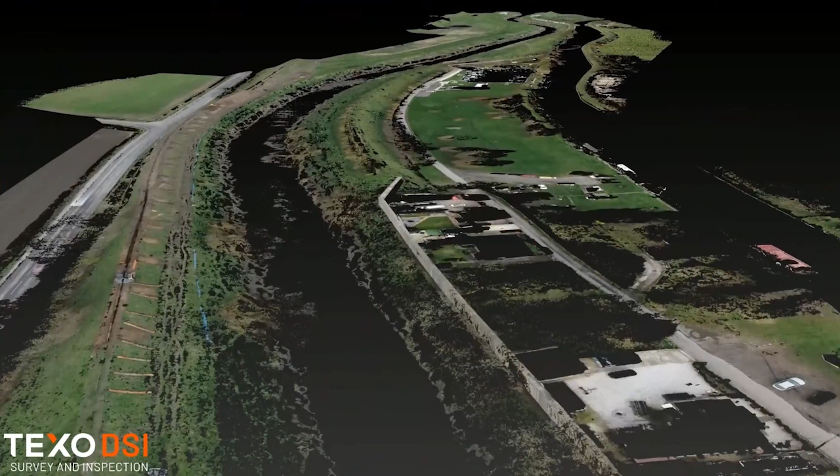Similarly, here, this was a construction project for a highway development in inaccessible areas, flown with UAV, with high resolution data able to be obtained.

Other aspects that can be mounted to UAVs include hyper and multispectral sensors, again able to cover large areas of land in short periods of time. And we're currently offering a range of hyperspectral data collection in a variety of environments.

You know, the human eye can utilize three different types of color receptors for red, green, and blue, but this camera system allows us to detect 270 different unique spectral bands, and that allows for the identification of many materials, which we're able to build into our in-house library.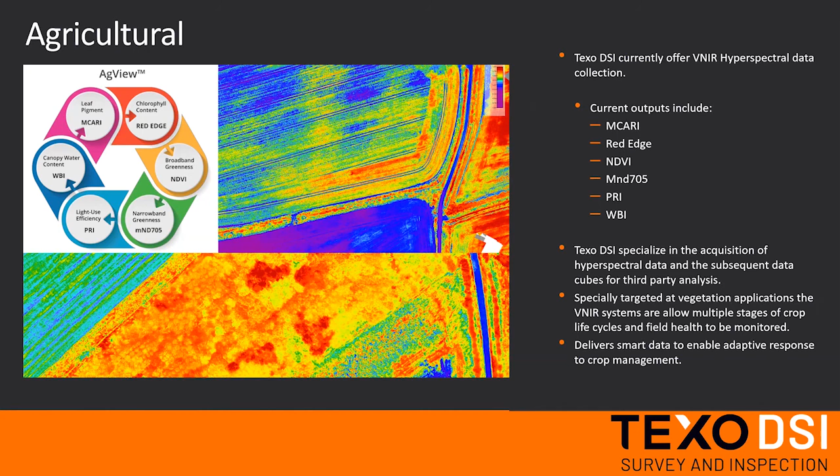And this has become a more and more widely used scenario across industries, such as for smart data management for crops and field health, as you see here. Combine this with LiDAR data, with photogrammetry as I displayed earlier, and with high resolution inspection imagery, and you really get a full suite of deliverables that enables you to make the correct decisions about a project, which is really what it's about.

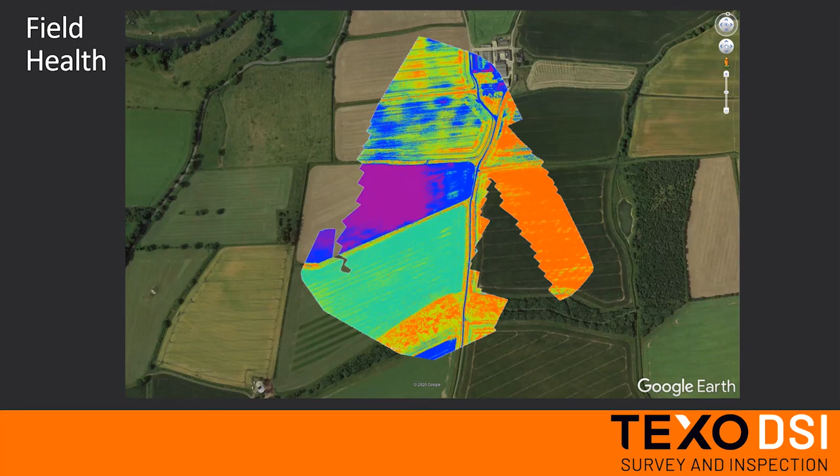So the key part of this is how we manage our data. We realize that we are creating value beyond what's been previously possible as an industry. However, as end clients, you need to have the ability to interact with that data, and you need to be able to gain 2D outputs from it.

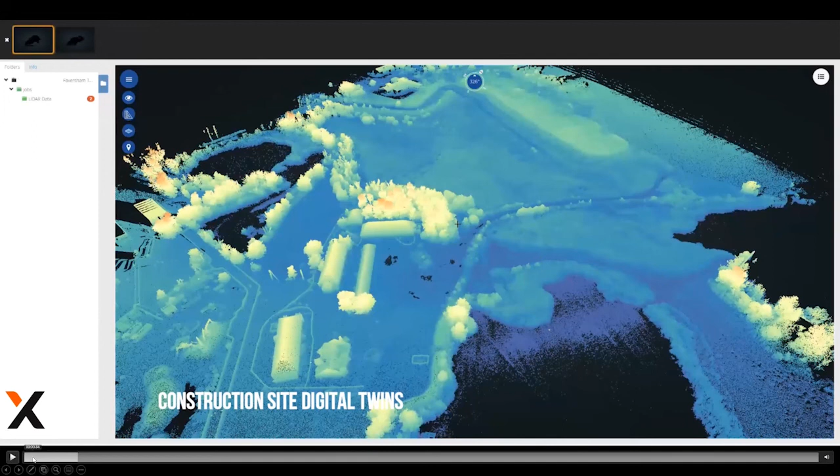So whether that be high resolution imagery, point clouds, or videos, we recognize that with the sheer amount of data being collected and the speed of that collection, there needs to be platforms that can visualize that to match. That's something we've developed here at Texo, and other survey companies have also done this - the industry is now adapting to cloud-based platforms that can manage this data and essentially act as a document control system.

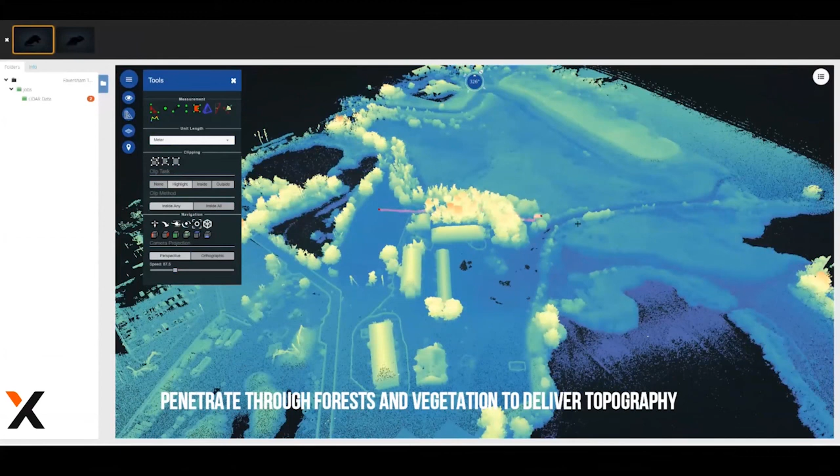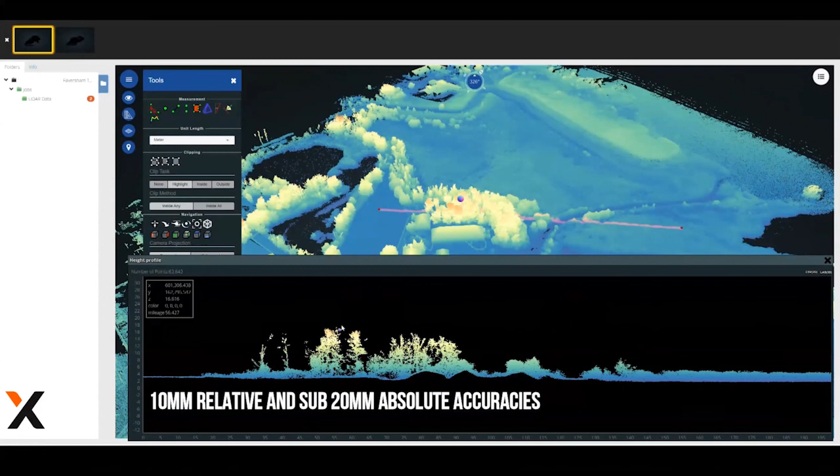And this video just highlights what's possible now. You're talking about a point cloud of billions of points on a surface collected in the space of a single flight. You're able to manipulate that, interact with it in a way never traditionally possible. Not only do you get traditional topographic drawings from it, but you're now able to delve into that 3D data and interact with it, whether that be point-to-point measurements, spot heights, height measurements, or volume calculations. It's at the click of a finger, and that's really where we've got to as an industry.

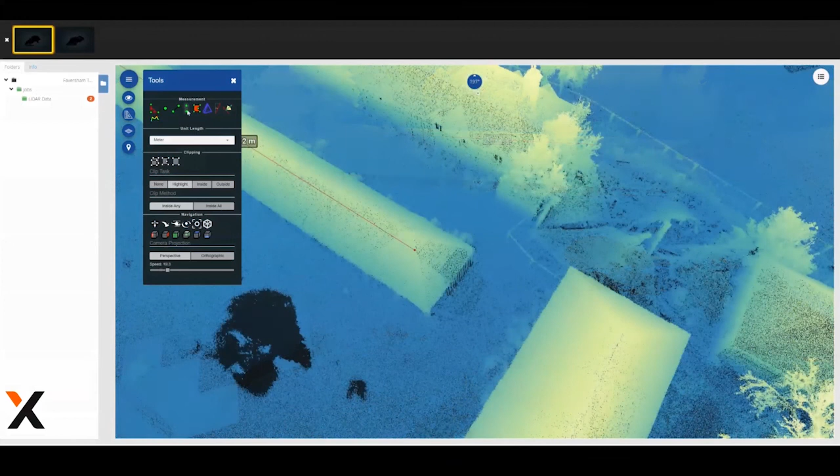It's how we've moved on from what is traditional 2D outputs, albeit we'll never lose sight of that. We've now moved into that 3D visualization environment, and being able to interact with this data is key.